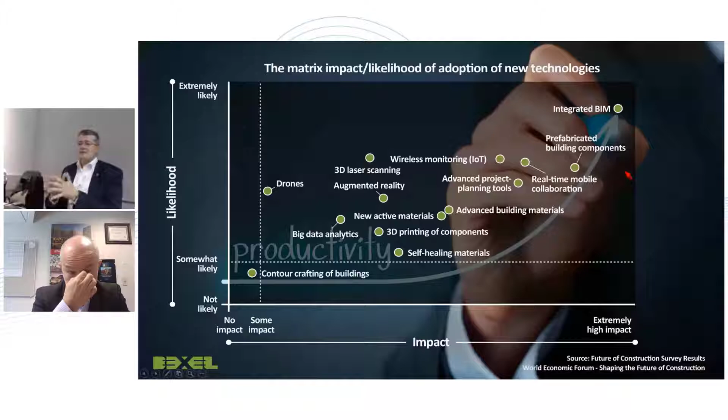Today, construction industry is moving from 10 to 15% of the entire global market. So if you say 80% of the budget, you cannot imagine how many trillion dollars we are talking about.

When I founded my company and started with this, there was a chart done by research done by NIST. At the time I was living in California, it was 2002, and they put a number of $15.8 billion lost due to inefficiency. Then economists put the number of 600 billion lost in the States due to inefficiency, lack of interoperability. And then I started to think, okay, come on, people are not efficient, people are not professional, people are lazy, a lot of things.

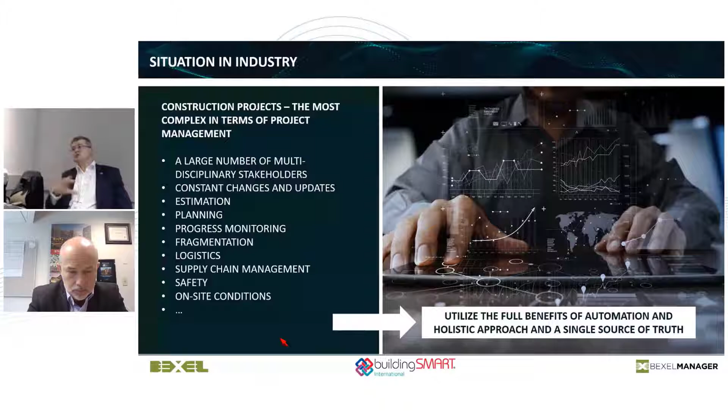And with automation, we can do some stuff. The other option is, I call this indemnity insurance or insurance policy - just give me your insurance, give me your insurance. Everyone is insured, but it doesn't help us to earn money. It's just how we share the risk.

We will not do anything with less money. We will not reduce our risks. We will just share the risks. So if I'm the contractor and I must sign, I just have 100 or 1,000 drawings, and the lawyer or the owner said, okay, 2 sentences. First, I confirm that in 2 weeks I check all drawings, there are no issues with drawings. And second, I check the cost estimate, that I have no objection to that.

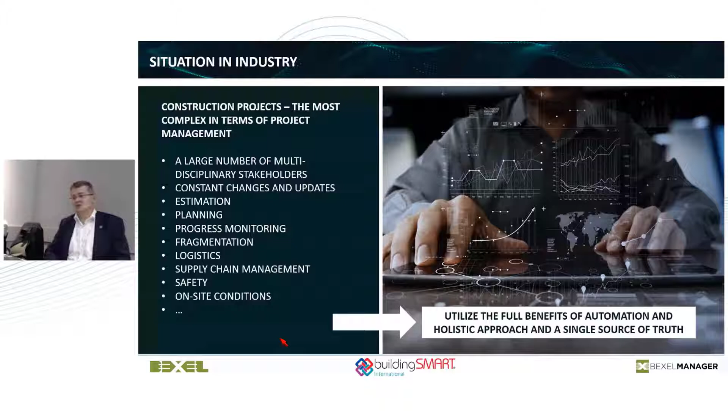And I need to put huge insurance. What everyone will do is add all those risks on top of their expected profit, so risk allowance, and include also all this risk indemnity expenses, because he knows he's in a very bad position. So we know the client always pays premium, or if he doesn't have a sophisticated contractor, he will literally lose the money. The question is when he will leave the project. Sometimes we can get the money from their insurance, but if we are politicians, the fact that we'll get money in 3 years from the court does not help us win the next election. So if the hospital is not opened as planned, nobody will care if we are right, contractor or designer. That's why we need to be aware of that fact.

So that's by far the most complex issue.

Another interesting thing is what are the barriers for using BIM. These are numbers from the UK. The first reply, two-thirds said, I'm not using BIM because it's not client demand. It's like saying I'm not using a cell phone because it's not mandatory in Canada. And I believe it's not. Is it? But why do we all...

So the truth is, if people say it's not client demand, honestly, they do not see the benefits. And that's true, and that's the problem. I have to be honest, as software vendors or implementers, or anyone, maybe. But the thing is people, we as humans, are very smart. If we see the benefits, we will immediately switch.

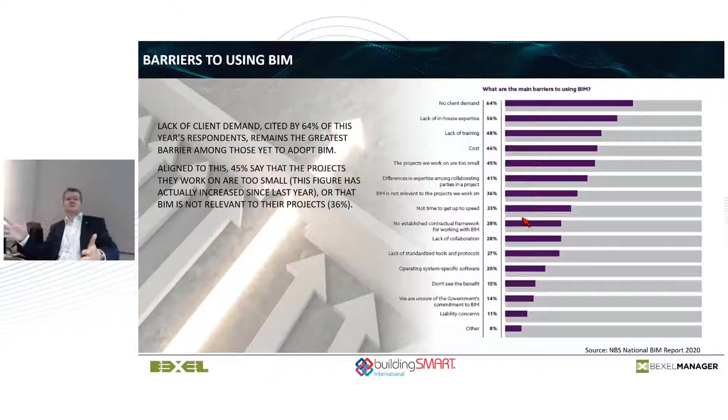IFC and not IFC. So I know there are a lot of things to be said against IFC, but I have to say this is the single greatest achievement we did in the last 20 years, and hopefully we will improve this. Whenever we talk about IFC, it reminds me of what Churchill said about democracy: the worst form of government, except from all those others we tried from time to time. And the same goes for IFC.

So there are a lot of issues whenever you are vendor dependent. You have a shareholder in your company who has a golden vote but has not purchased your shares, got them for free, and he may or may not want to tell you that, this is the question. So do not be, if possible, dependent on any single vendor, because unfortunately, they or we will misuse your trust, now or a bit later.

So this is very important, it's about the process. And everything I'm going to say today is about the process, and you should ask for and set up good processes, and for the tools which are available, you need to ask good and smart questions. I wanted to say that in Europe, talking as a consultant, our European Association sent a lot of letters to the European Commission about that. So it's really important, because the industry is facing a lot of challenges if you are too much dependent on any vendor.

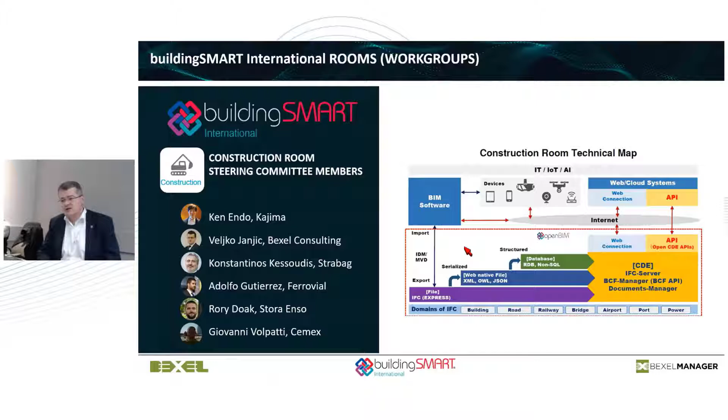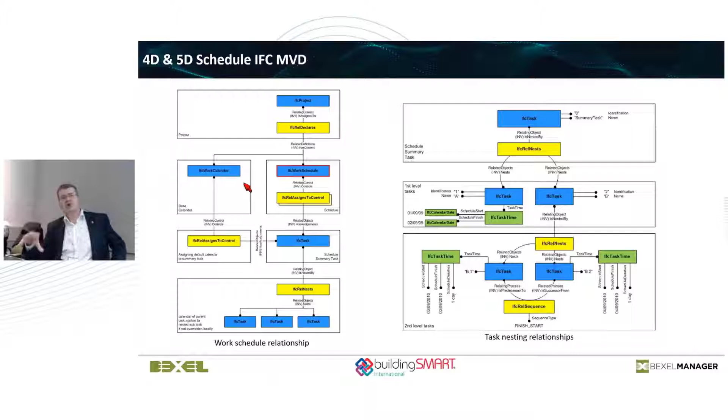We have also two other colleagues, one from Cemex and one from Stora Enso. Here are some of the technology and standards things we are working on. I don't want to take too much of your time or go into technical details. These are the relationships we have in a BIM model, a lot of semantics and so on. If you want, I'm here with my colleagues for the next couple of days, you can ask Ken, Rory, or me about this whenever you want.

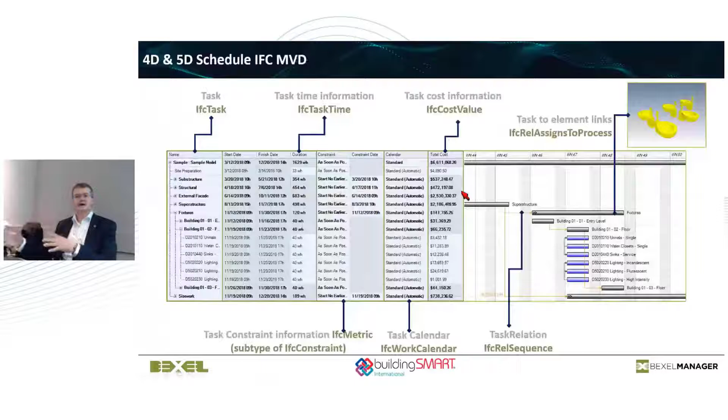But these are the schemas and everything we have developed. How in open format you can define the task, cost, values, everything. So every tool is supposed to read that. It's not Bexel format, or Primavera format, or Navis format, or Microsoft Project format. It should be an open format, and you can exchange the data.

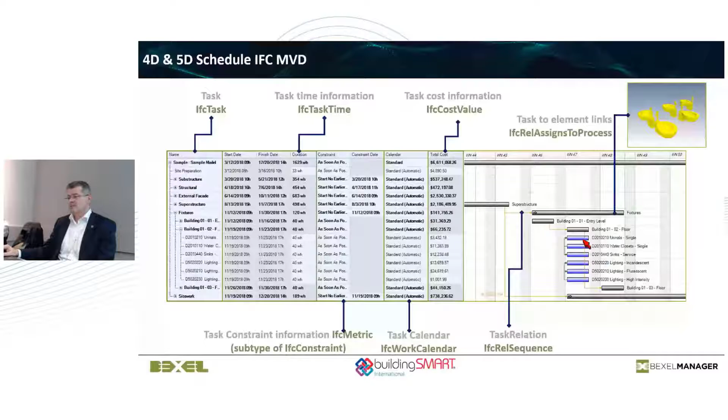The same goes with cost. You need to organize the data in a proper way. It's not Excel, because the idea is that whenever you click a single element, you can analyze the cost of that single element, and organize your cost structure according to any need.

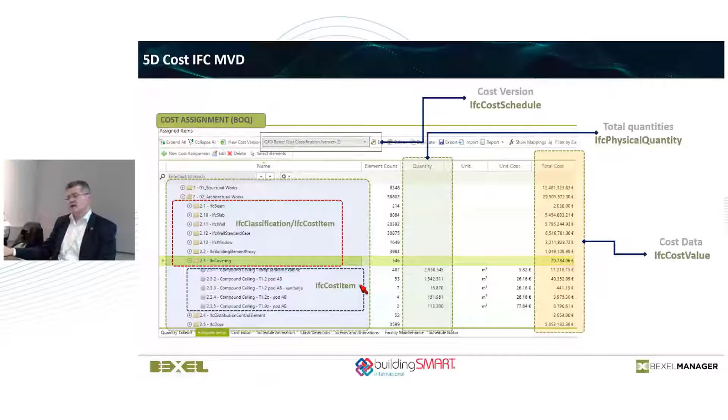I want to tell you where we are today. Certain things in our construction, in our IFC, are still missing in the construction phase. What is missing? Good semantics for changes. So we can transfer a construction schedule in a proper open format today from one tool to another, but the system does not have semantics. What does it mean? If you change something in the model, a new application will not know how to change the construction schedule, or how to update the cost.

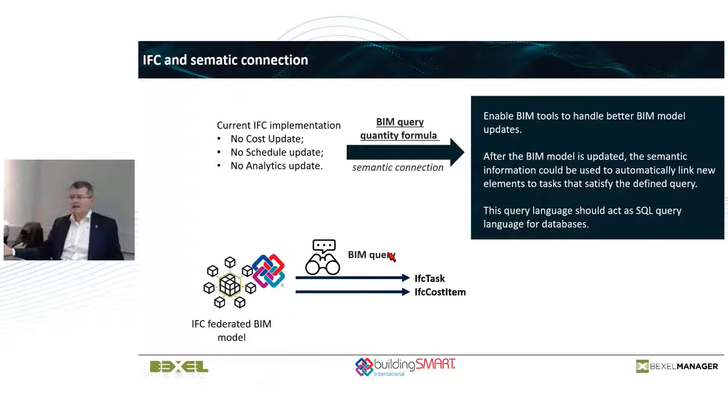What we really hope to do in the next version is also to add this semantics. I will explain to you where we are today with the authoring tools and non-BIM systems. So today we have on the left-hand side authoring tools, which are very good, can be combined and integrated in a quite fine way. I don't want to mention any tools specifically, but you can find a lot of examples.

Then you have a strong planning, estimation, procurement, or financial accounting software or tool, and you just connect the BIM model, sometimes manually, sometimes semi-automatically, with the data which is generated not in the BIM system, but outside BIM. And the problem with this is a time component. So this is at that stage, estimation is at that stage, progress is at that stage, documents are maybe here, but it's not the same. How do we know it's not a single source of truth?

If we change the model, is the construction schedule going to automatically change in the planning software? The answer is no. Is the system going to have a new additional 200 cubic meters of walls added to a certain task? The answer usually is not. So we need to manually do all the stuff we already had to do, and then even connect this with the BIM model. When you look at this, can you see the optimization in time? Can you see that something will be much more accurate? Are we using all this data generated in BIM? Unfortunately not, or not too much.

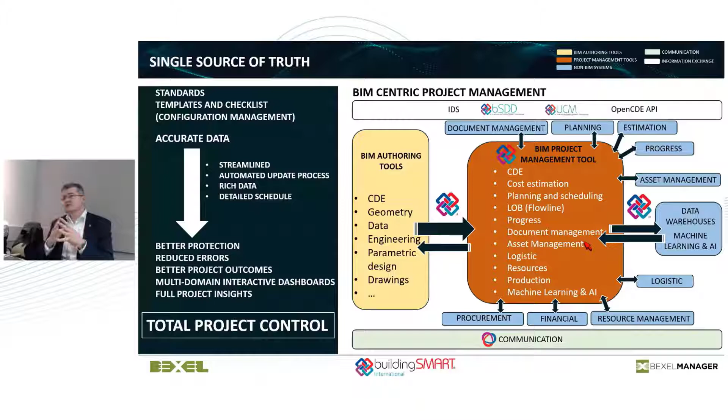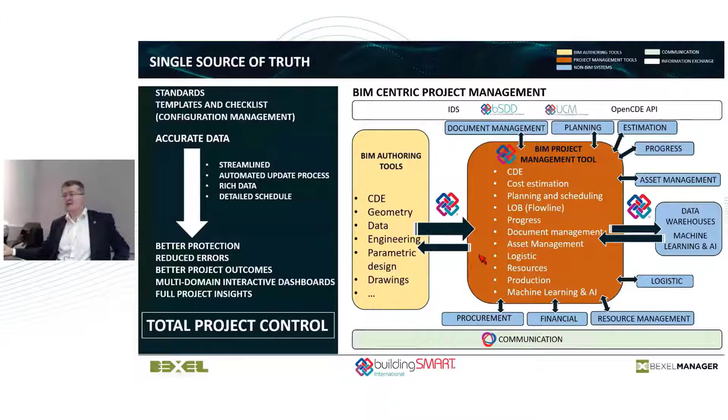If we could have not one, but several tools, or could promote those tools, that might help us in the future. Just to give you one example, this is one football stadium for the next World Cup, actually next month, and these are the numbers: 72 million property values. A database for one average university over a couple of years has less data than that model.

And how to develop a schedule? Start from scratch and manually create 15,000 tasks. And do a cost estimate with 10,000 tasks, again manual. And then the model is updated. And then consultants say, pay me gold, diamonds, whatever, I will not do anything else, because I have no energy, no money, nothing. My people will leave my company because they cannot and won't do all this stuff again.

So we should try to do that if possible. And we as Bexel, I have to say, are trying to do that. So this is not the only part of the equation. Of course, we are focusing now on this. There are a lot of other things which can be improved, but it will be good to use as much as we can for all analysis. So I will just mention some of them.

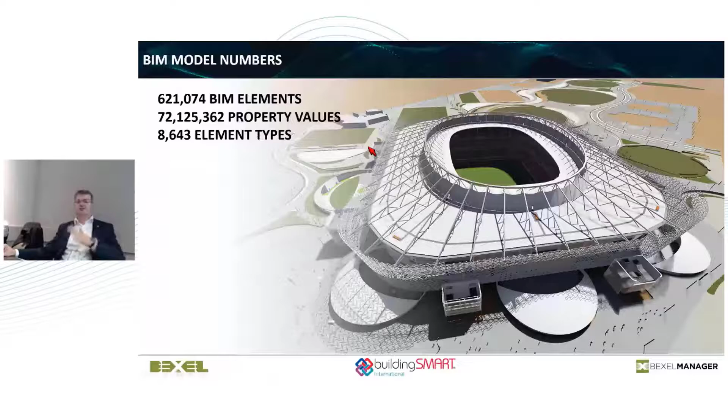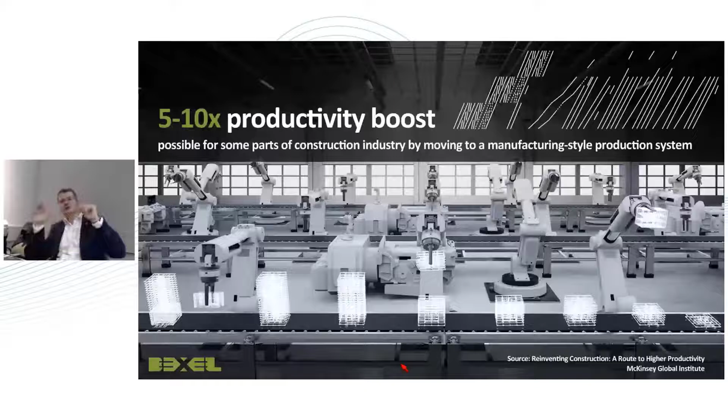But another very interesting thing we at Bexel are trying to do is what Henry Ford did with assembly lines more than a century ago. Before Henry Ford, you would sit down and negotiate with the guy in charge of developing a car for you, saying I would like a wheel like that, I would like that. So you spent a lot of time negotiating with them, and at the end, you got a very expensive car, and the warranty was 500 miles max, because that was actually the first time that type of car was built. So no testing, nothing. And he switched this.

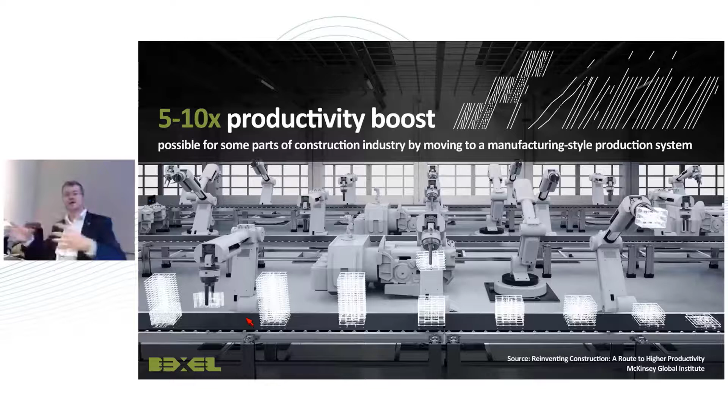So what is the vision? McKinsey said that if we apply assembly line principles to construction processes, we can optimize, not everything, but some processes, hopefully a significant part, by 5 to 10 times. The idea is, instead of moving the car on the assembly line, to move your workforce, just to follow a certain path and location, not to overlap. It's called location-based scheduling, and that's actually what we're doing.

Can you help now? Yes, one's coming. Okay, thanks. So okay, I will now try without slides to explain.

Construction. We have Patrick here with us, with BIM, BAM, BOOM. Maybe you've heard this. But the truth is that 'boom' is for over 40 or 100 years of operation, and that's why the operations guys say it's more important. Yeah, it is, but over 100 years. And in these 2 years, we have much more challenges. BIM is least used in that stage, because of all these reasons, it's very difficult to implement BIM, because construction management is the most complex.

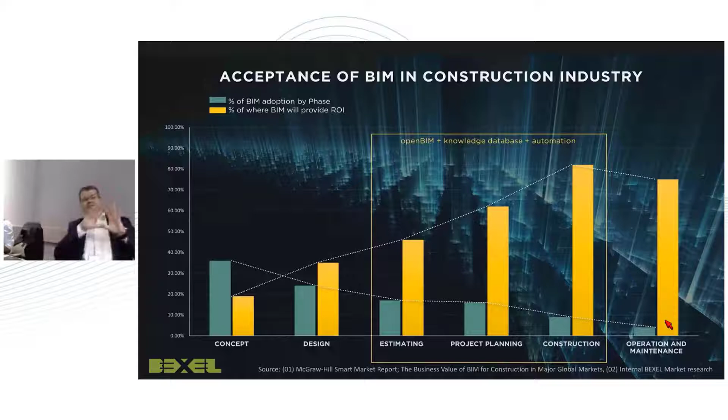But can you tell me what is your best guess? How much time, on average, from 100% of his time, is construction work actually really working on site? 10%? Okay, you said 10. Unbelievable, I have to say congratulations, because usually in Europe people say 70% or 55. But you mentioned two excellent numbers, 25 and 10. The reality is 15.

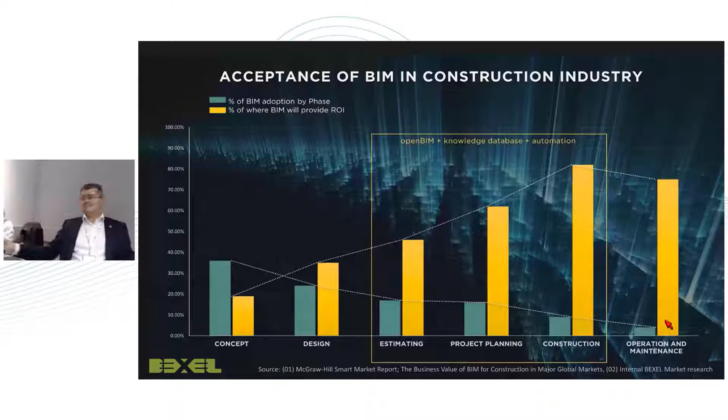And these are all the other workers doing the same stuff, then the wrong sequence. I put parquet and now I'm about to paint the ceiling. I need to protect the parquet. I need to work 10 times slower because some guys had more parquet guys and they installed parquet in the entire building. But in my contract was the deadline, it was not said I'm not allowed to do that before it was painted. So that's the sequence. Can you imagine the assembly line to first install seats and then do interior painting?

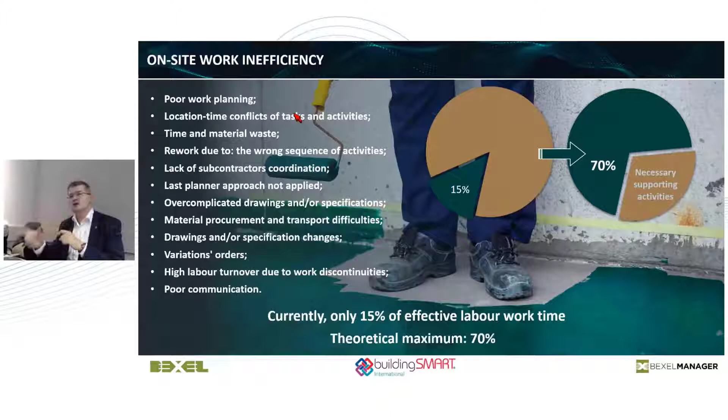It's possible, but then we need to protect this. It will take 10 times more time, and of course some paint will always stay on the seats. But with the assembly line, Henry Ford knew that it is possible. On 90% of locations in both high-rise buildings and infrastructure projects, location-based proper scheduling is possible.

So what BEXEL is trying to do, with knowledge databases, we call this configuration. Have you heard about the term configuration management? Where you set up all your templates, rules of measurements, naming conventions, protocols for communication. Whenever you start a big project, you should set up all this or have it already prepared. So we try to allow users rules to set up all this before they start executing the process, and then with automated processes, try to produce as much information as possible.

And here are some examples. What is also very important is to always have open documentation and access to your data. So that's just good advice, maybe. Always ask, can I access all the data I produced? That's the first thing. If the answer is no, that's not fair, simply, because you produce the data, not the software vendor.

Sometimes even to ask, to be honest, it's a myth that it must be stored on vendor premises. For example, from day one, we allow all slightly bigger clients to store everything on their servers or wherever they decide. Because it's now very strange, I want to tell you what we are talking about in the European Union. Don't want to mention some vendors, but, you know, I promise you I am not going to misuse your data. And then I acquire a machine learning company.

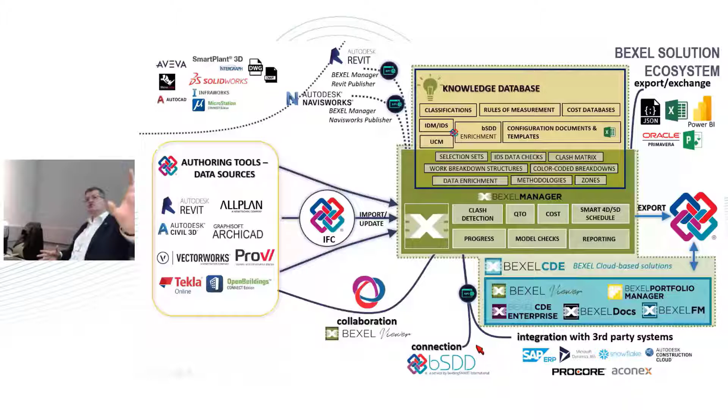And machine learning does not work without data, simply cannot work. So you have a vendor who is not a construction company, who is not the client, who is just a technology provider. He tells you, I'm not going to use your data, but I have a machine learning company. You should charge them for that. But really, you should ask, is this the huge value I'm giving you, or the opposite, say, can you host this on my premises?

And sometimes they will do that if you put good pressure on them, because everyone can do that. They will find a number of excuses not to do that. It's like, you know, I'm going to enter your house, but I promise I'm not going to take anything from you. Or the second option, I don't need to enter your house. Just, this is an idea which can help.

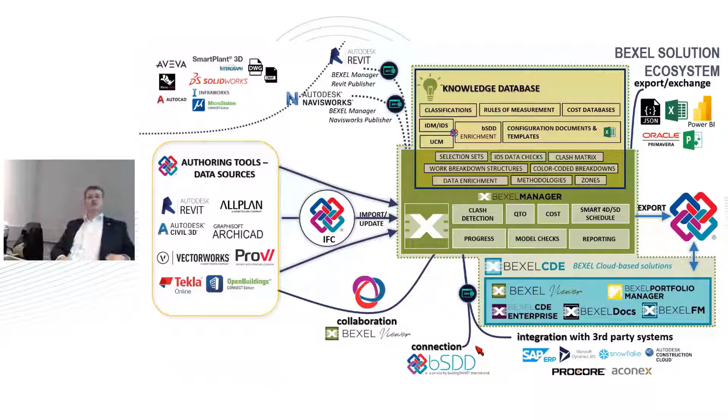And there is also, you know, blockchain and so on. In the future, hopefully, every data you produce, which is very valuable, can be protected. So when you remove your key, it's useless, and nobody can use the data unless you allow them. You can just set up a system so that it's only used when you are using your data. This is a concept of blockchain, but in the future this could be as well.

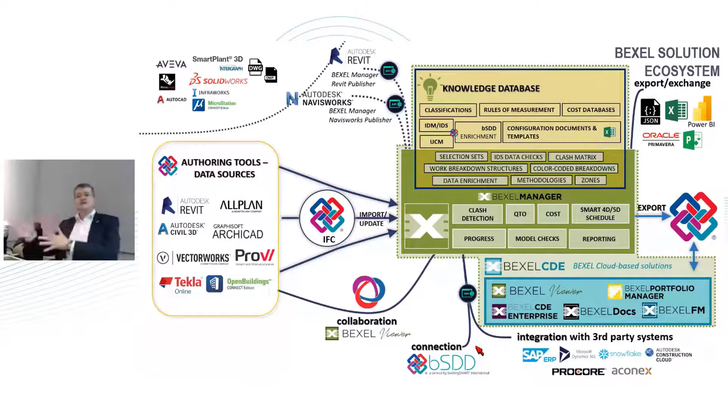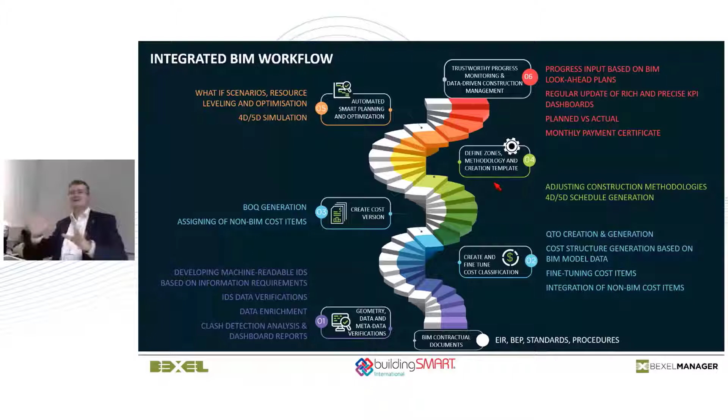So this is very important, just to know that this should be analyzed. I don't want to say that all these problems can be solved, but this is just something you should take care about, or ask yourself how you position yourself. So some compromises are, of course, very important. So this is BEXEL.

I will just now talk about technology because Tomislav is also waiting, and I like to talk sometimes too much. Sorry about that. But you see, this is a difference.

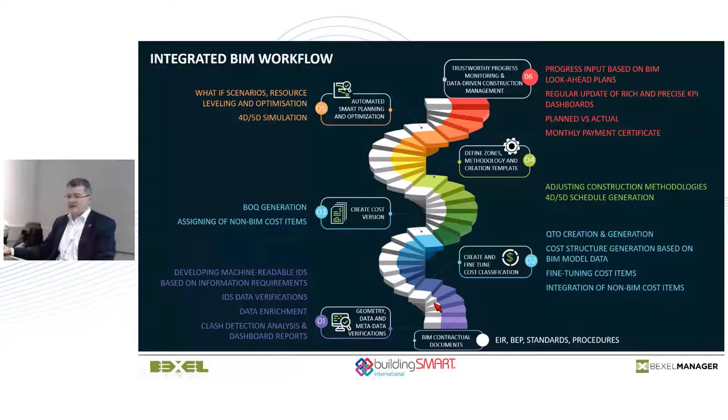The idea is you will see some workflows, how Bexel automatically reads the data and uses everything available to, in an intelligent way, create automatic construction schedules, relationships, and cost estimates. Are you familiar with location-based scheduling or line of balance?

So the ratio between the workers must be optimal. And you need to define what in Germany is called Takt - they call this Taktplanung, or plan cycles. When you define a cycle, it's like a cycle of an assembly line.

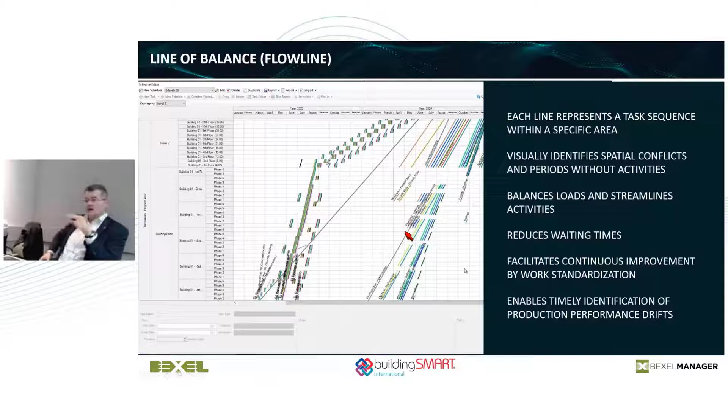So this is very important - assembly line. And what is interesting: what was first, line of balance, flow lines, or critical path and Gantt charts? What do you think?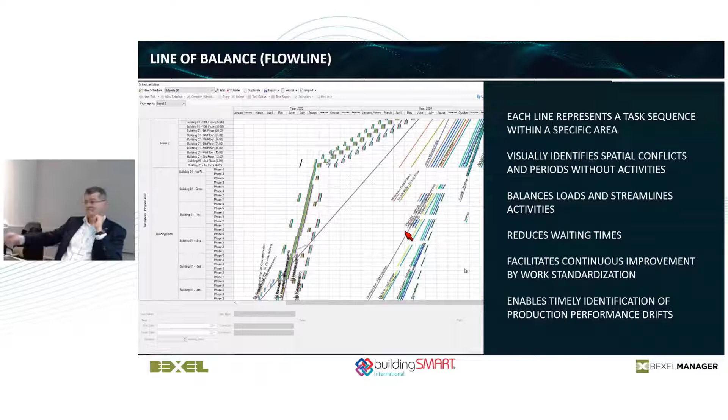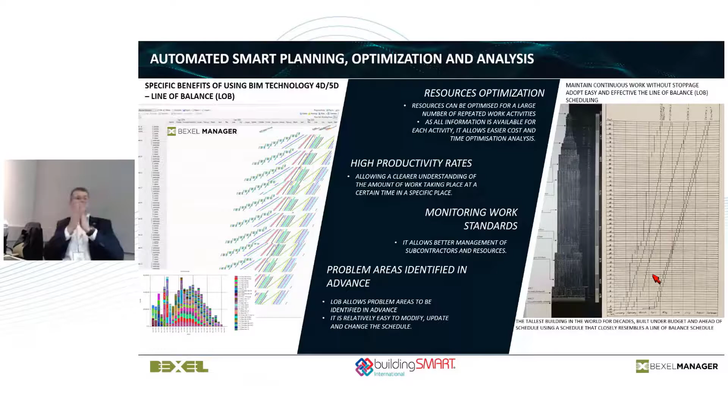I'll just show the original. Do you recognize this building? This is the Empire State Building and line of balance. Do you know how much time we needed to build this? 13 months. Bravo, 13 months. How much time would we need today? Is any contractor here willing to sign up to build it? This was for 40 years the tallest building in the world, 381 meters plus 40 meters of antennas.

13 months. Of course you will say safety was the issue. Indians, Navajo, I think, tribe guys are not afraid of height, but still the number of people, safety was also decent there, and everything which is on the critical path was there.

But this is an example from Bexel, so line of balance - you can see quite similar. As you see, the guys did this on paper. It was in the 30s. So, okay.

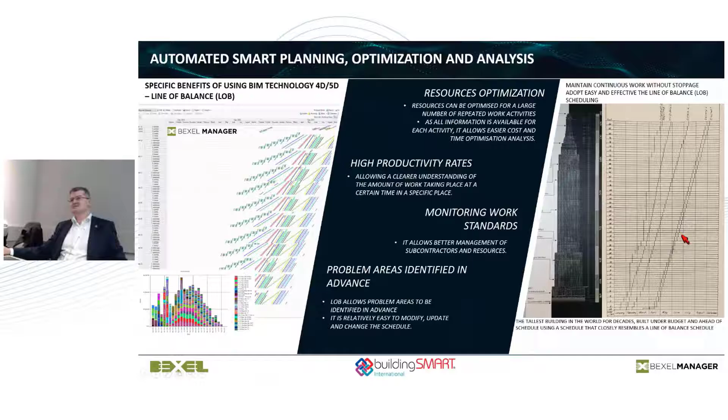So the idea is knowledge based - set up all your standards. Standards are crucial. Without standards, as I explained, construction projects are extremely difficult, and we cannot do anything. So you need to develop all checklists, processes, and other stuff in order to be more successful, because you cannot handle the projects without that.

And now I will show you some videos and processes and how it's done in Bexel. One video is all this checklist, just to have an idea how it looks like. So you just go import IFC files, and then you will see it perform as much analysis as possible.

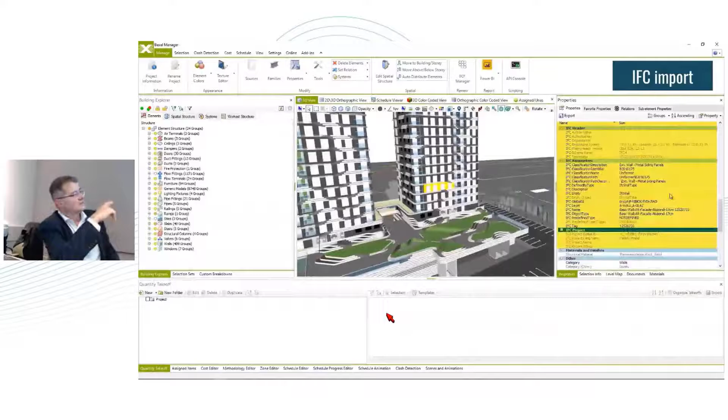First, the system will check if you have certain properties, and if you don't have uniform codes again - sorry about that. So the thing is, the system, we tried as much as possible to automatically generate and enter data.

So the first phase is, you don't have cost codes in the BIM model - you can define the rules. So if it's, let's say, ceiling, I believe, if I'm right, it's C3030 by Uniformat. So you can just add that code so if the element is a ceiling, it adds the code automatically. The idea is not to say you need to manually enter all codes. So you can say, if it's a bearing wall, it's B2010; if it's not a bearing wall, it's C1010. So you can read the different properties, and we call this automated data enrichment.

So what helps you is that whenever you update the model, you will immediately have to always ask yourself about the process and identify the slow things in the process. I have to say I learned this, maybe he's not aware of that.

Well, the owner of the largest German privately owned consultant and project management company, he's a very smart old gentleman, and he always asked the questions. He taught me this: always ask about the process. Once we had a meeting, he was asking the company about the process.

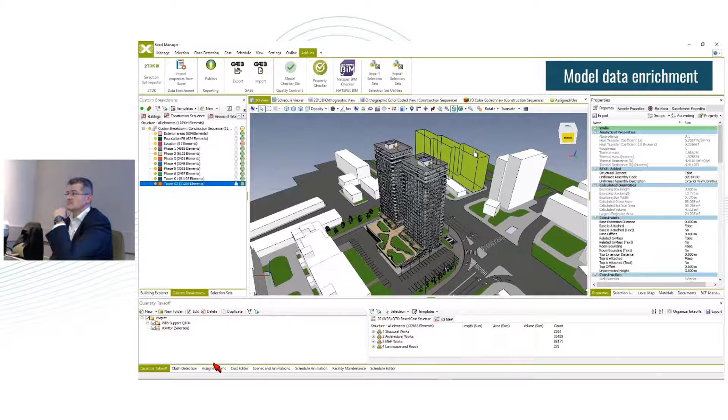Can I ask a question? Yes, please. Earlier in the presentation, you mentioned adding some semantic relationships between the products and subsystems, so when something changed, the rest evolves automatically. I come from the manufacturing world, we do prefabrication, and we go to level 400, it's mandatory, otherwise we cannot produce. I understand your point that the end customer might not need that level of information, but how do you create the bridge between that very detailed semantic relationship that drives a fabrication shop, and bring it back into your higher scheme of organization at the project management level?

First, do you work with manufacturers? Yeah. Thank you for saying this, you're completely right. So as a manufacturer, it's in your interest to do LOD 400, and that's an excellent example why you should do that. But it's not because it's a requirement, it's because it helps you connect your manufacturing process, and that's an excellent example of how Bexel, for instance, works.

Bexel has rules of measurement. So for example, whenever you add, let's say I have 10 types of doors, instead of, in RS Means, the guys from Boston, very smart, but they have 60,000 or 100,000 cost items. The problem is whenever you're about to do a cost estimate, they have different types, different doors in your project that never match, and then you need to manually add those missing cost items.

So how does Bexel react? It connects the proper cost classification group to a certain cost item, then at the last level, reads that in the system I have 15 doors, and it will literally create 15 specific cost items for those 15 doors, and automatically match and use the formula, which could be count, per square meter, or any other thing. So this is how Bexel uses IFC or BIM data to automatically create fit-for-purpose cost items for that particular project.

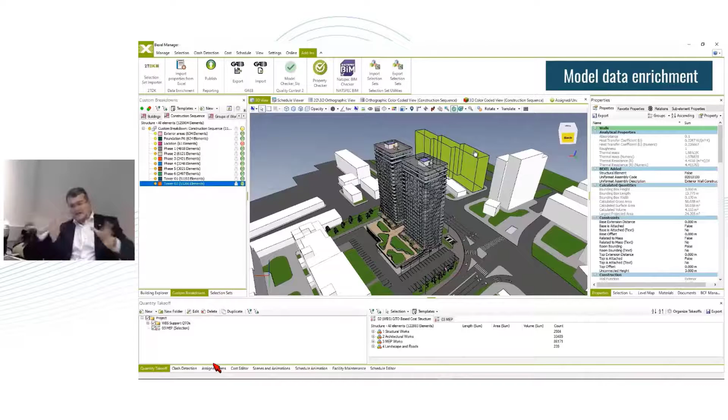Or if I have a wall of 20 centimeters, or 25, or 8-inch, 6-inch, 4-inch here in the States - okay, in Canada you use meters - but the system will recognize what you have and create tailored cost items for your project. But that's from the detail part upstream.

What if you change something that affects the product downstream? Can you go back to the level of detail for the manufacturer in order for them to update their schedule, their costing, their planning line by line, and the plant, and inventory, and all these things that matter for a manufacturer?

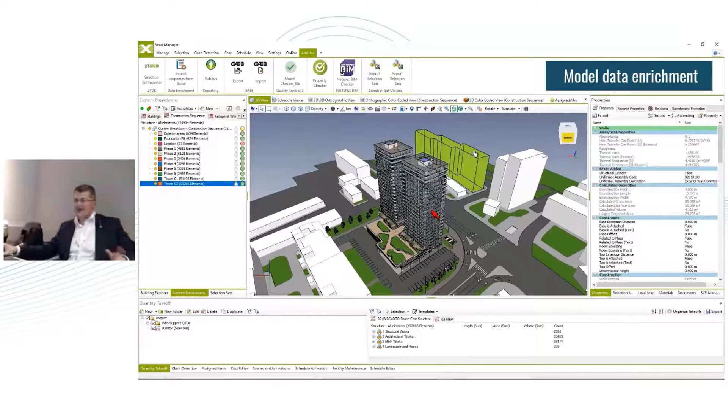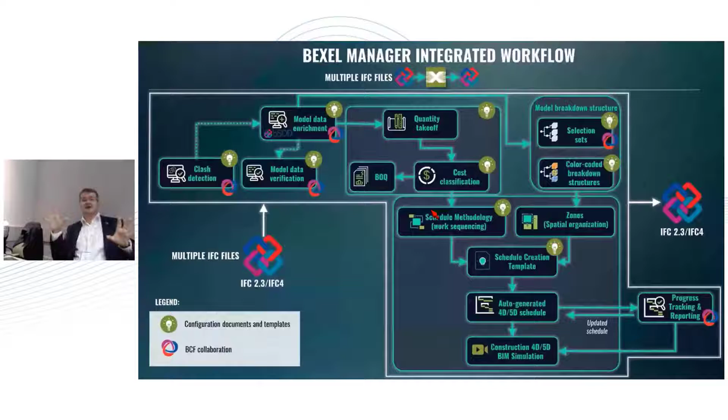So to answer your question, we have what is called scheduling logic. It's an excellent question. We are not solving all the problems, but let me speed up with some stuff here.

This is how you do data checks and enrichments to teach the system. So on every project, like a high-rise building, you start with the signage of your property, then you build some barriers, then you do some excavation, then you start with foundation works, then core works, and then all structural elements.

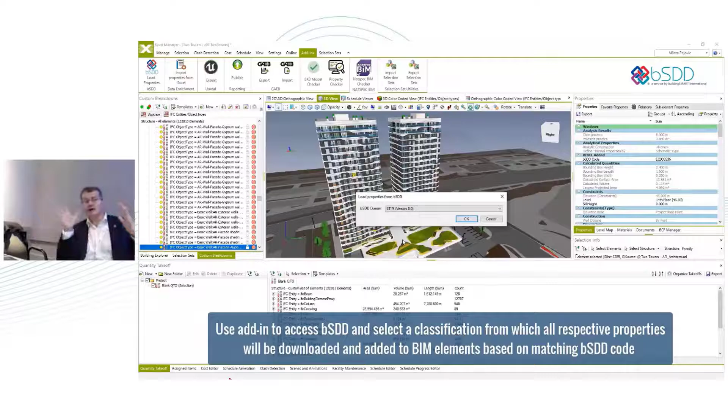You also have the factor of gravity, so you should usually start from below and go up. And then you have the sequence in every room: I first do that work, then another work, then another, and you develop a sequence of works. I'm not talking about manufacturing, I'm talking about construction site works, and for us this is the assembly line.

In Bexel, you define that assembly line like a process map. You define relationships too, so when I'm pouring concrete, maybe I need to wait 2 days after that. The beauty is that across all projects, all buildings, all floors, the system creates relationships for 2 days, finish-start plus 48 hours, whether calendar hours or 2 days. The system automatically, by knowing which group of elements, creates those intelligent queries.

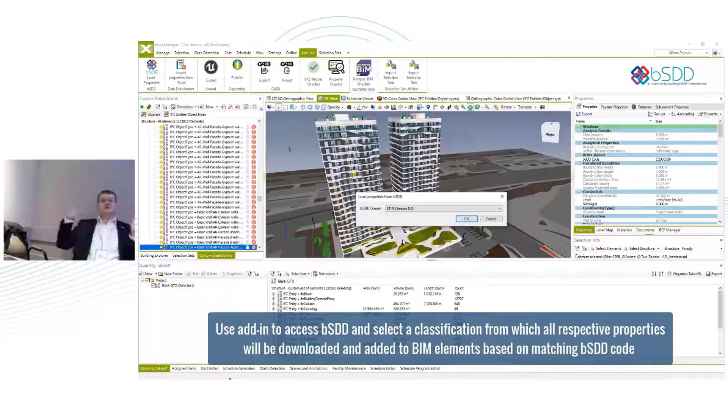When you update the model, the system, unfortunately I can't show you now, creates 10,000 or 20,000 relationships and tasks, has a perfect match, and you define the cycle.

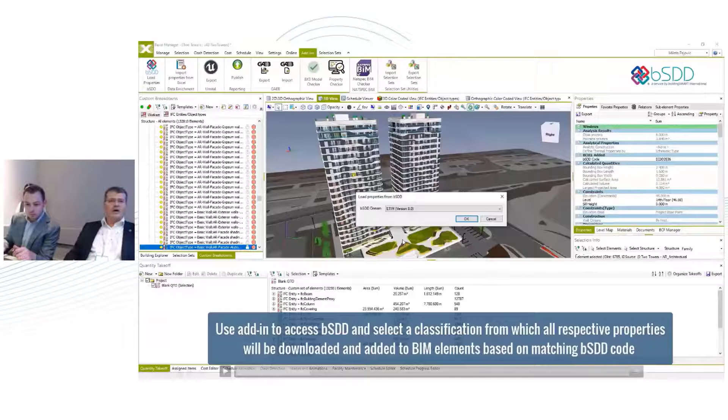This is another step based on your experience. You can also do resource leveling later, but based on experience you can say one week is a good cycle for me, or 3 days is a good cycle. You can have different cycles in different phases, so structural work could be a 5 day cycle, finishes a 3 day cycle.

Literally, the system creates all relationships and automatically calculates costs. So you have a resource, how many cubic meters on site you need every day, how many tiles you need, how much parquet you need to have.

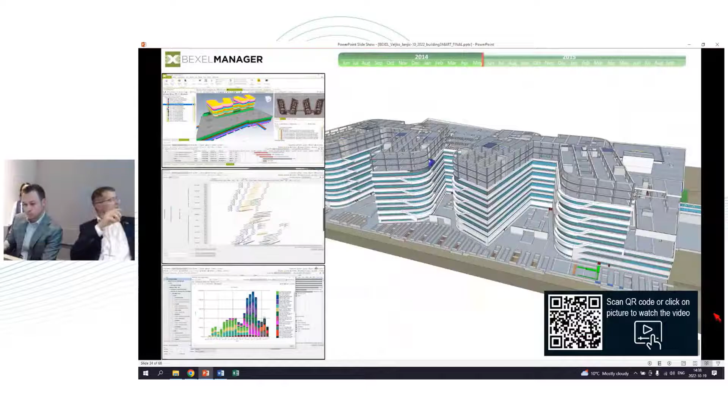Thank you. And when the system, then you do a fine tuning, and based on those rules, whenever you update the model... okay, thank you. The thing is, you can produce all this very interesting output, you can go on our website and see simulations and so on.

I don't know if I just click here, what is the problem?

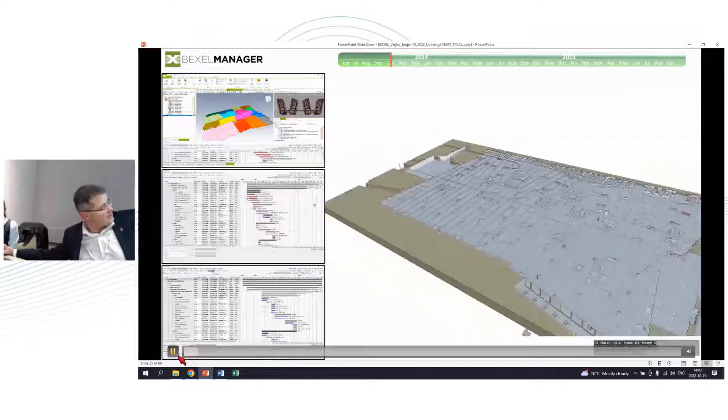So this is, for example, one of the largest hospitals in the world, and this was done in less than a day. So you see all activities, what is done each day, cash flow, automatically.

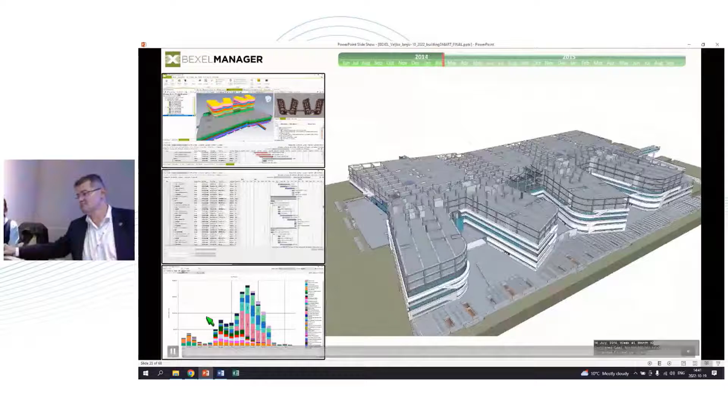Do you have that on your webpage, that video? Yes, you go to our YouTube channel and can see it. Or LinkedIn as well. Just look for Bexel Consult, Bexel Manager, our products, and you will see those videos.

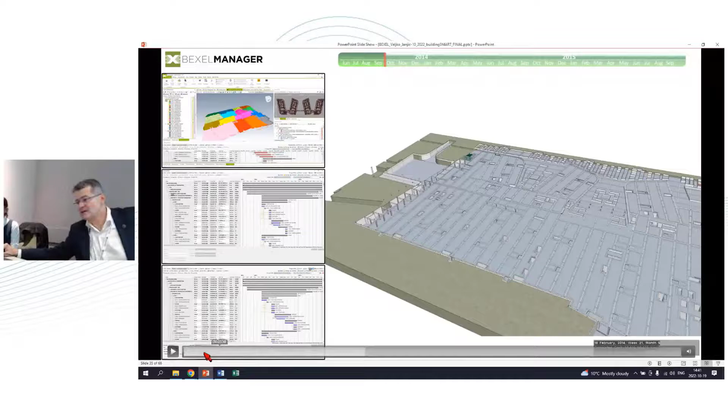Anyway, I wanted to show you how you define that methodology.

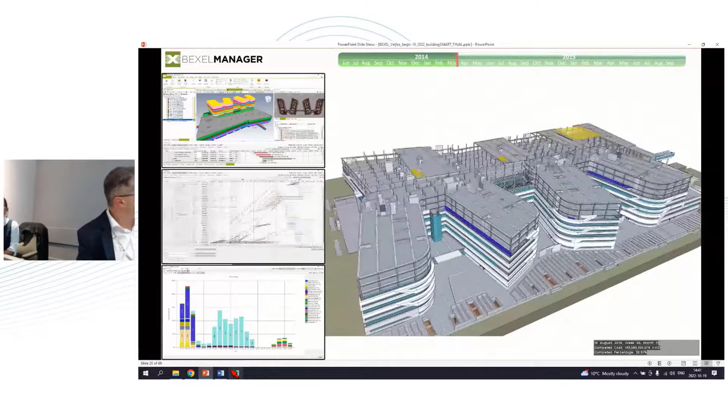The idea is that with all analytics, resource usage, Gantt charts, equipment usage, or materials, you have everything already ready, so you can automatically analyze and optimize the process.

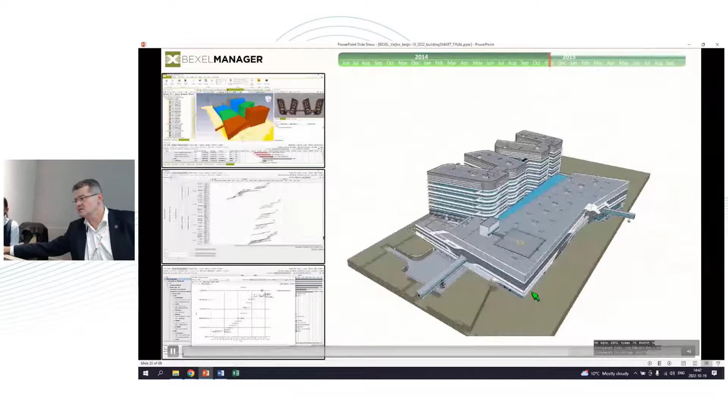You can also see some other interesting simulations and so on. I wanted to show you in this case how this is generated, so you need to trust us.

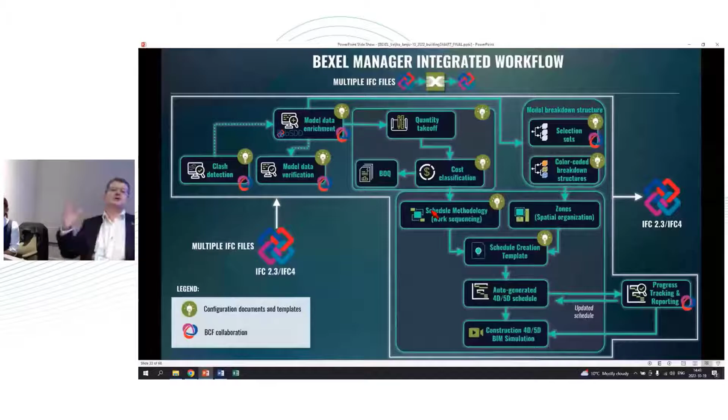There's a lot of things I wanted to show you also, like CDE and how it works, how you use a common data environment, how you store documents, just to give you some use cases with automation. One thing is how you enter progress on site.

The obvious way is that you manually enter, let's say, 50% of a certain work is finished and so on. And you know those numbers are not always very accurate, because it's very difficult to know the actual amount of work done.

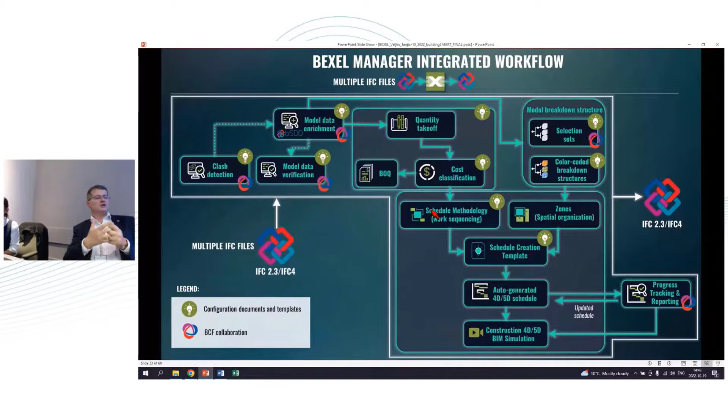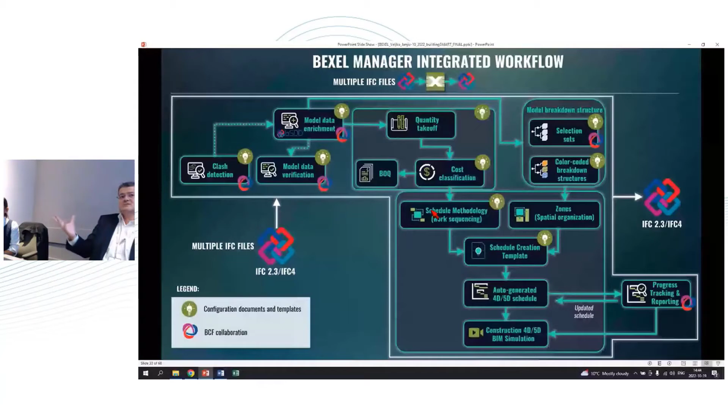The idea is also about what has to be done in the next week. Usually you sit down as a foreman and say, okay, you should work there, you should do that, and so on, because that's the way we do work. Or you sketch it on the site.